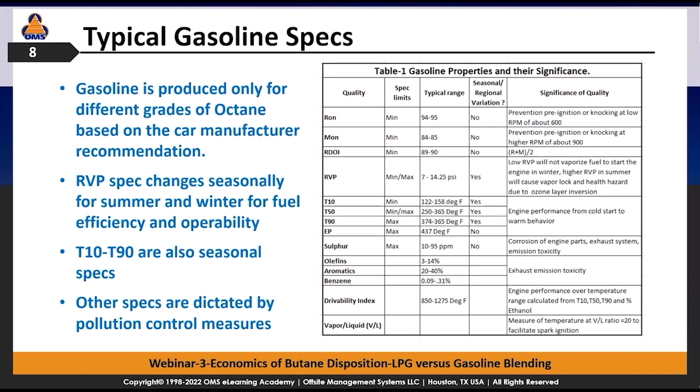So the RVP spec changes, and the T10 to T90 distillation points are also seasonal specs because they affect the volatility of the fuel. Other specs are dictated by pollution control measures. So we'll discuss two-component blending in the webinar, namely blending butane in 87 gasoline to minimize RVP giveaway. Since butane also has high octane, we will also minimize the octane giveaway in the final blend to further maximize the benefits. Butane has a high octane, 93 if you look at this chart, and we can use its octane value in the final blend with butane.

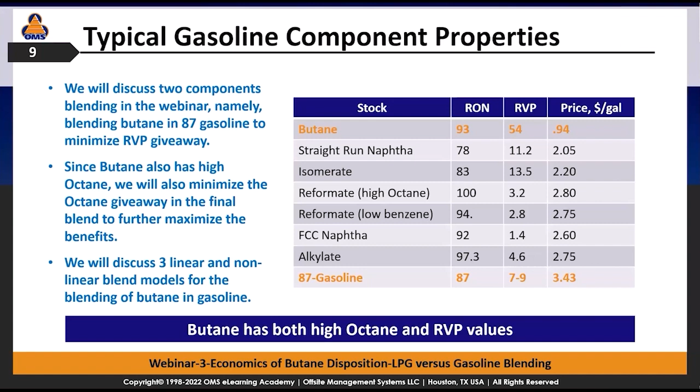In terms of mechanics of blending, we'll discuss three models, linear and nonlinear blend models, for the blending of butane and gasoline. So based on the USA scenario, refineries in the USA have three seasonal and regional phases of gasoline production corresponding to the RVP spec given by EPA. The ramping down period, from January 15 to May 1st, is to reduce RVP content from 14 psi to the regional spec of 7, 7.8 or 9 psi. This is called the ramping down phase.

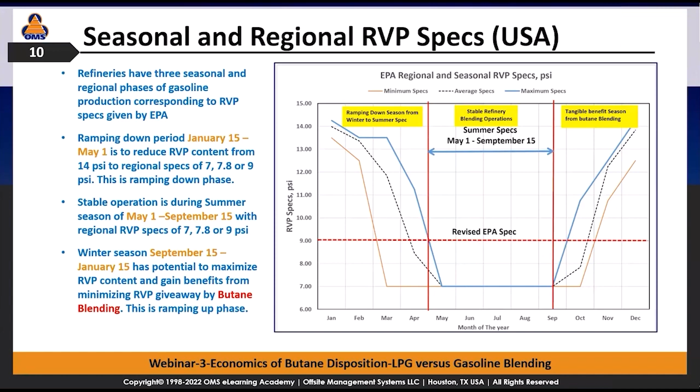Stable operation in summer is from May 1st to September 15th, with a regional RVP spec of 7, 7.8 or 9. The winter season, from September 15 to January 15, has the potential to maximize RVP content and gain benefits from minimizing RVP giveaway by butane blending. This is the ramping up phase. Have you ever wondered why gasoline is so expensive in summer?

It's not necessarily because the demand is higher, but the cost of production is also higher. Refiners must use expensive components to meet octane value, and the RVP spec is low, and they can meet that just by RVP values of the component. As winter comes, refiners start using more butane to take advantage of higher RVP specs, and butane can meet the requirement at much lower cost. Hence, the price of gasoline comes down in the winter months, and also demand is lower in winter as people do not travel on vacation by road.

Now let's look at the economics of the butane blending. The butane has two disposition routes, either an LPG, which has 69 to 70% butane, or gasoline to meet its higher RVP spec. The price differential between butane and LPG is $1 per gallon. Now, this economics may change based on the current season or the country, but the principle is the same. So, whereas if butane is added to the gasoline, it gives a price spread of 2.49 per gallon, a profit of 250% over its LPG value.

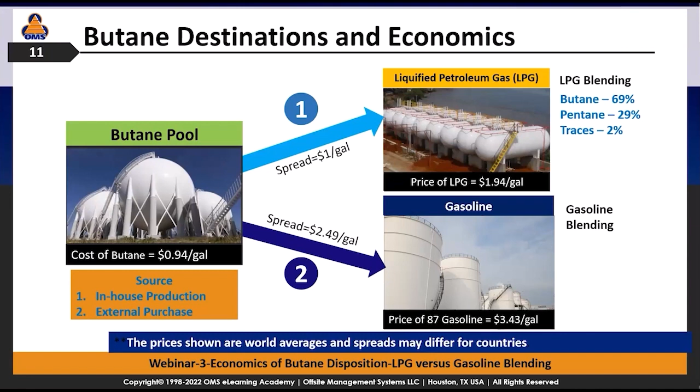Refiners and traders cannot ignore this substantial economic incentive of butane blending. The same benefit will depend upon gasoline, LPG, and butane prices and vary from season or country, but the basic economic principle is the same.

Let's discuss the supply chain of butane. Large refineries produce butane from natural gas processing, from crude processing, or natural gas processing from gas field. Small refineries import butane from external sources. Butane is then stored in refrigerated tanks at the refinery or temporarily in trucks or rail cars. Gasoline comes from a local refinery storage tank or pipeline from remote refineries.

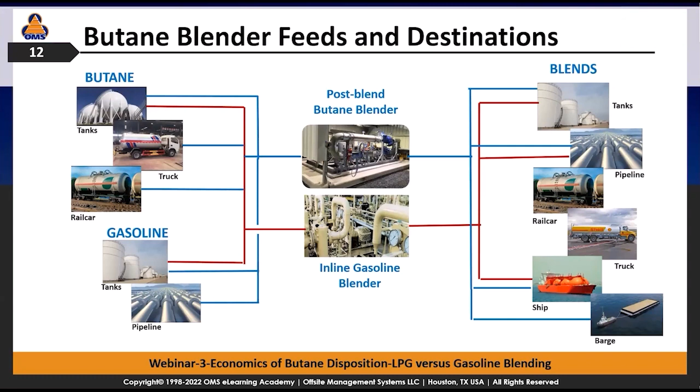Butane then can be used in a small quantity in inline gasoline blending, or large amount is post-gasoline blends using butane blenders. I discussed before, butane blending is a two-component blend, while inline blending is a multi-component blending. Blended products are dispatched to end user either by tanks, pipelines, rail cars, trucks, ships, or barges. Butane is also blended directly into pipelines, ships, and trucks at terminals.

Butane blending is simpler than gasoline blending. Gasoline blending must use many models for different qualities and must optimize the blend composition. Butane blending, on the other hand, is a two-component blending system and is deterministic. Butane and gasoline composition is unique for a given blend RVP and does not require an optimizer.

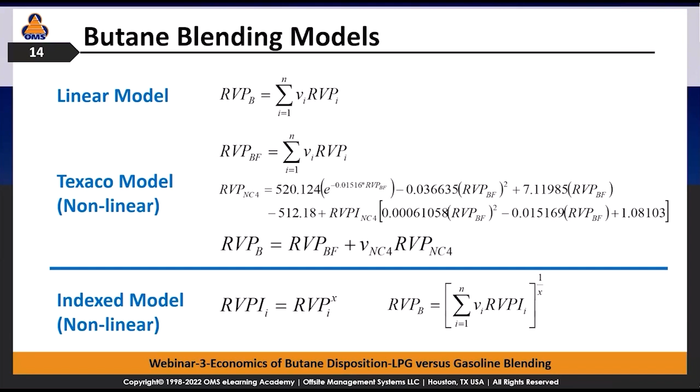RVP has three models, linear and nonlinear. Texaco model does not have its customizable parameters, and it just adjusts RVP value of butane in the blend. The index method has a parameter X, with a generic value of 1.25, but must be customized by regression in the gasoline blending system. Both Texaco and index method can include a bias term from feedback.

This slide shows the two-component butane blender and shows how we can solve its composition deterministically. Texaco model modifies the practical RVP value of butane in the blend. The index method changes RVP values of butane, gasoline, and blend to blend them linearly. The composition of butane and gasoline in the blend can be solved very simply using Excel.

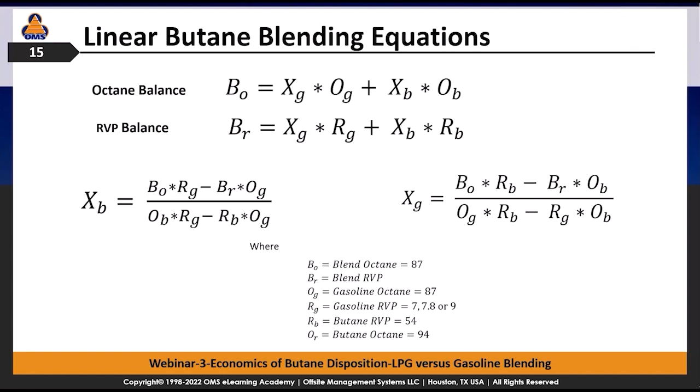My company had developed an Excel-based calculator to estimate the benefit of butane blending for September the 15th through May the 1st, assuming a daily batch of 100 kb of blend. I used the Texaco model to give the most conservative estimate, but the calculator used all three models for comparison purpose. It shows that butane blending can generate additional revenue of $236 million for 6 months of winter, or $1.32 million per batch of 100 kb gasoline.

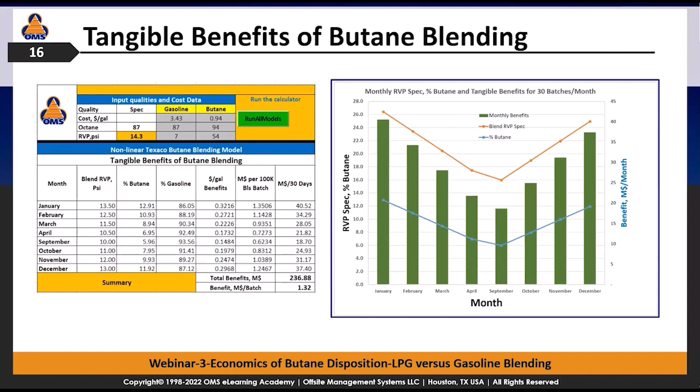Butane is used as much as 13% to ramp up RVP to 13.5 psi. You can use this calculator to input the price of butane and gasoline for different grades at different locations in the world. So what we have learned is that butane blending is simpler than gasoline blending in terms of number of components and blend models. It presents a vast economic opportunity to realize $237 million in just 6 months.

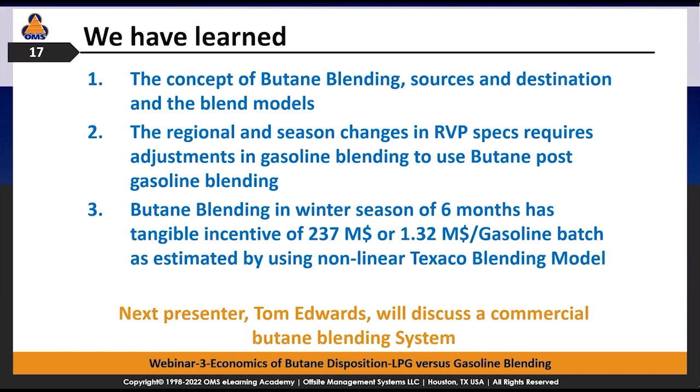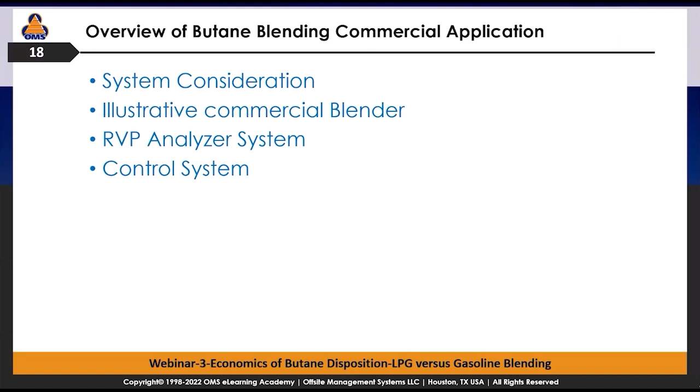We are now going to get into the mechanisms of butane blending. We're going to first discuss the system considerations, the overall strategic use of it, and then we'll go over a commercial blender project that we did. Talk further about the important analysis system and also the important control system.

So the first step is the storage of the butane. There are various methods of storage, and your choice is really going to be a matter of circumstance and not actually your choice, right? So if you don't have a dock, you're not going to be able to get it from a ship. But if your plant has existing bullets or spheres for storage, then you're good. Otherwise, we're going to have to decide whether to have a permanent storage facility installed, or if we're going to use a temporary method, like rail cars or trucks or ships.

So the permanent storage method is better because we don't have any disruptions from whether the truck arrives late or during a changeover from one truck to another. Also, while the temporary storage method is going to be less costly, if that truck or rail car is going to sit at your facility for a month, that might not be thought of as a temporary storage.

Once we have our storage figured out, we're going to have to transfer that butane to the process. That transfer is straightforward, right? We're just going to use pumps. The only important part is that there's going to be a gaseous phase of that butane, and we can't really inject that in the process. So as we set up the transfer system, we're going to have to take that into consideration.

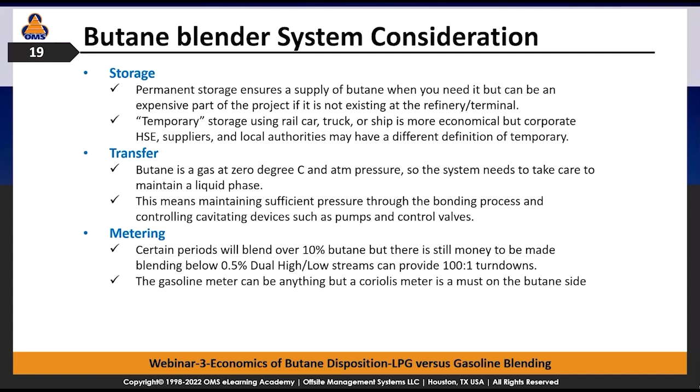The gasoline meter is not an important aspect of that, but the butane meter is. So we're going to use Coriolis meters because they can ignore the gaseous phase. They can also detect the gaseous phase. So there's really no reason to not use a Coriolis meter.

The RVP analyzer is almost always justified because you can target a final RVP very close. It is not a necessity because, as Suresh mentioned, there are algorithms where you can determine the amount of butane that you need to put into that stream. The trouble is you're not going to be able to target plus or minus 0.1 psi on your RVP, because if you go over, it's a big problem.

So our systems use these RVP analyzers. They require a 7-minute period to retrieve the results. And we always incorporate two. One, the method that is used is a triple expansion method, so these systems have a piston within them, and that's susceptible to failure. So with using two analyzers, we can always have a backup in case one fails and needs to be repaired. Further, by using two, if they're both operational, we can stagger them so we can get results in 3.5 minutes rather than 7.

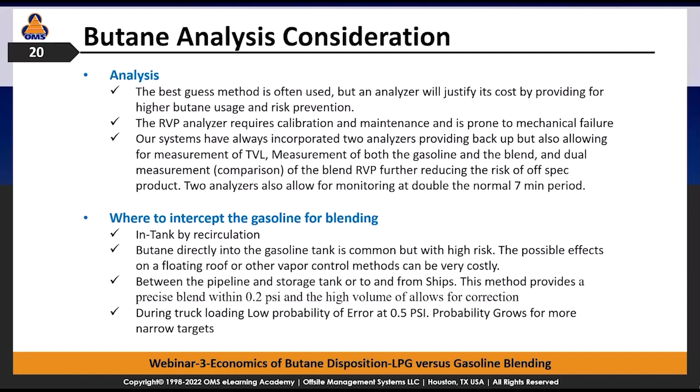There's an important aspect of this in that we need to have sufficient back pressure on that gasoline so that when we inject the butane, it doesn't immediately go to its gaseous phase. So that happens around 50 psi or so. This particular unit has a mechanical back pressure regulator, but it's just as easy to use a butterfly valve with flow control or back pressure control.

It has 2 analyzers. It receives butane directly from a truck, so there is no permanent storage facility. And interestingly enough, this particular unit is in a tropical location. So it's not just the northern regions that can benefit from this.

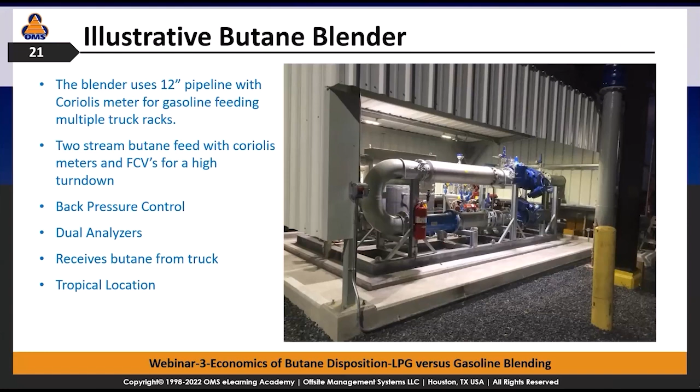And so there are various manufacturers, right? Grabner makes them, Eralytics, PAC, ABB. They all have these analyzers. They all function exactly the same. These analyzers require a nitrogen purge and climate control on them, both heating and cooling. And because they have raw gasoline or butane within the cabinet, a nitrogen purge rather than air purge is required. They also need to be calibrated at least once a week, and that can be done automatically.

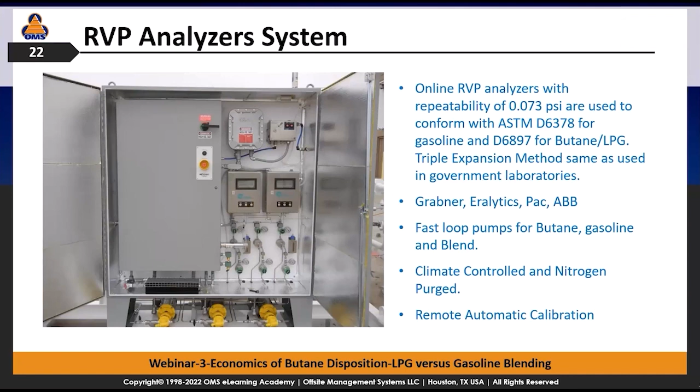We also are going to monitor the pressure of that gasoline because we don't want to throw butane into an atmospheric pressure line and have it turn to gas right away. So the control system prevents that automatically. So when we start putting in the butane, we've measured the RVP of the gasoline.

We're going to use an algorithm inside, like Suresh discussed, and start putting in butane, targeting a point lower than the maximum allowable. Once that occurs, 7 minutes later, we get to read the results of that. And with that feedback, we begin adjusting more butane in. And this unit is going to record the volumes used all the time.

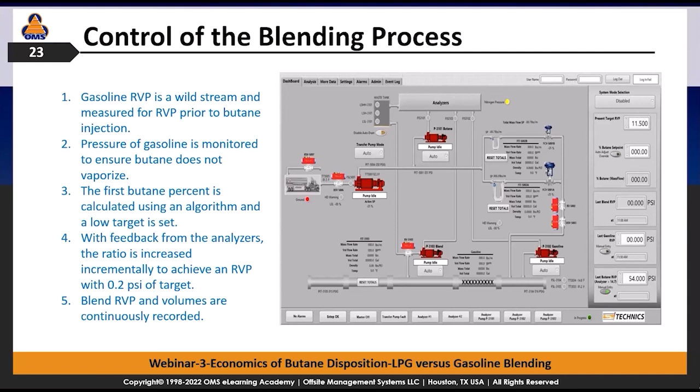So what we have learned today: we have learned the concept of butane blending with respect to its significance for the gasoline properties. Then we also discussed a way to estimate the tangible benefits due to seasonal and regional RVP specs, and we have developed a calculator for that. Now, even though we discussed the USA scenario, this concept can be applicable to any country or any region in the world.

Then finally, we also discussed commercial butane blending, and Mr. Tom Edwards was able to discuss that. This is a calculator that you will be receiving after the review.

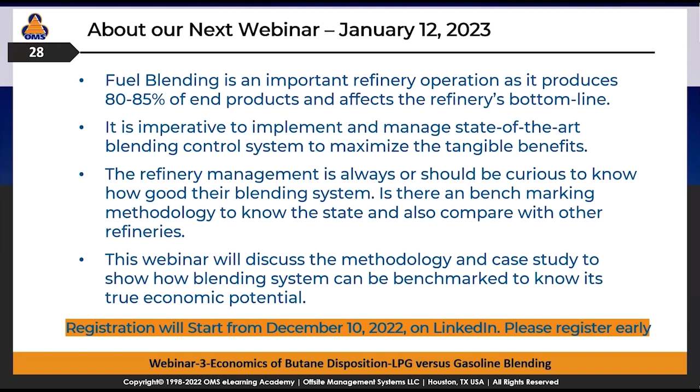Before we get to the poll question, there is one question in chat. The question is: is this butane blending economics valid under all scenarios? And what factors other than economics affect the butane disposition to LPG versus gasoline?

Well, the concept is valid for the USA because there is a wide variation in temperature from the northern to southern region, and also EPA specs. But let's talk about a country like India. I was looking at some internet search, and surprisingly, the consumption of LPG increased in 2020 more than 2019. The reason was the COVID pandemic: people were staying home to cook rather than driving. So the economics really depend upon the region and country, and the calculator can really tell you whether it is beneficial or not.